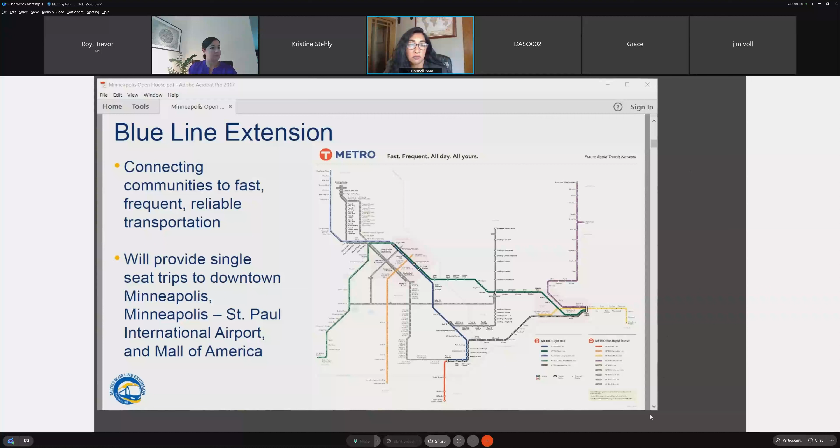fast, frequent, reliable way. The exciting piece about the Blue Line Extension is when you hop on one of those trains, you'll be able to connect not only to downtown, but to the airport and ultimately the Mall of America without transferring to another train. It's a single ride. If you do want to transfer to get to St. Paul, then you just hop onto the Green Line and make your way to either downtown St. Paul or the University of Minnesota or points in between. So it's part of a larger system that we see of connecting the region. And this is a very critical part for us, for some of the communities that are looking for a transit

investment. To talk a little bit about where we are in the project process, folks might be like, is this the same project that has been in discussions or thought about or designed for many years? Yes, it is the same project. So last year we had to take a little bit of a pause and just identify another way for us to move forward with the project. As folks may remember, part of our original alignment had 8 miles that was co-located with a freight railroad. That co-location of the light rail was on freight railroad right-of-way, so we needed their permission to be on the right-of-way. That was not an agreement that we were able to reach with the freight railroads.

So last August, the Met Council and Hennepin County decided to make a little bit of a shift and begin to think about how we can ultimately get this line into operations, but having a little bit more control of it. So last August, we began to talk to community members, basically reach out and say, how can we identify a community-supported route that can move forward and really serve our region and be part of that connected map as we just shared with you. So that's where we are right now. And our hope is that by the end of this year, we will have a community-supported route.

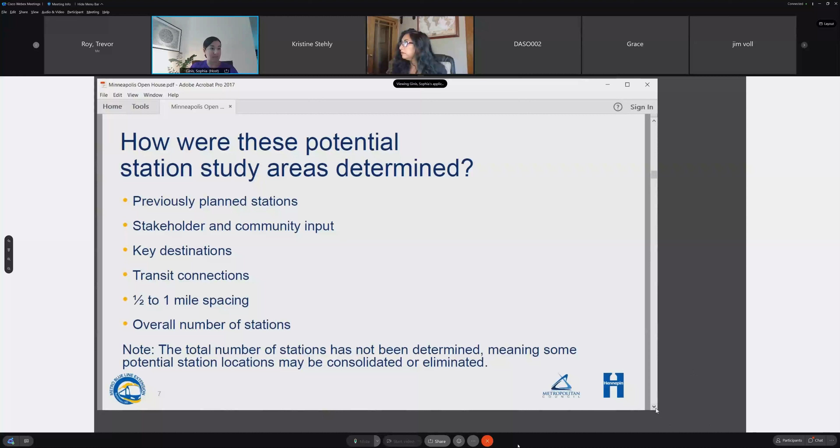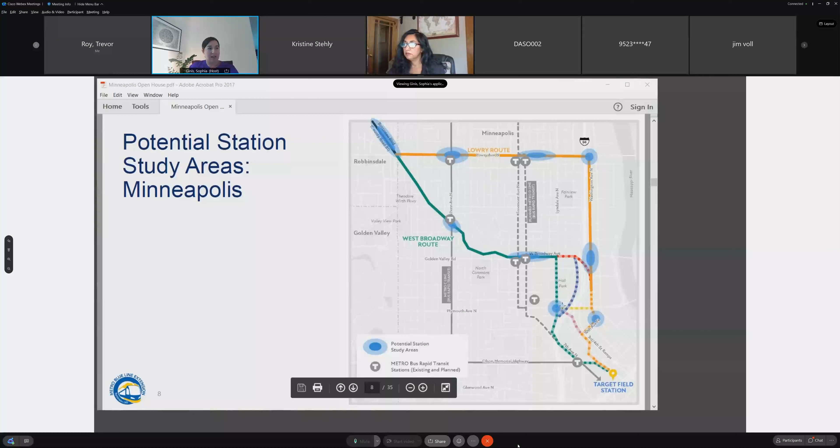And then something as we go through the links, potentially in that Plymouth area. And if you're traveling to West Broadway, there's multiple configurations that you could get there. So whether you're going the orange to the red, or some version of the orange to the pink, or the blue, or the green to the blue, having a couple stations placed along that way.

So how will we evaluate these going forward? We have a set of project principles on our website that speak to a whole bunch of different things, like serving people, improving transit, but also avoiding property acquisition, continued public engagement, and engineering requirements. What works the best purely physically, and what is best serving our destinations, major destinations, employment centers and things like that. The available right-of-way is related to the engineering requirements and how that all fits in. And of course, our existing land uses: what best supports a station the most in an area.

So things that we would like to hear from you. Are we missing locations, major locations that people want to go? Do these feel right for today and tomorrow? Any specific considerations we should be taking as we specifically place the stations, and honoring community assets along the way.

That's just kind of a little bit of an overview of our stations in Minneapolis. If you're looking for the overall project route, we do have more information on our website and can answer more questions on that.

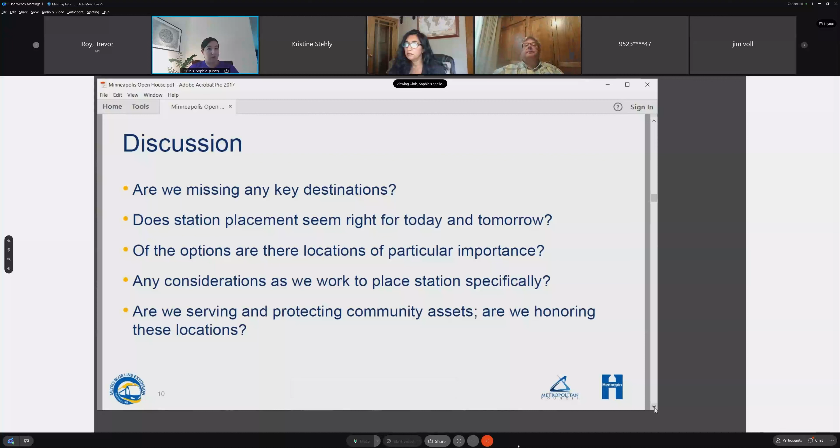So with that, I'm going to turn the presentation over to my colleague, Dan Soler, who is going to walk through some of how LRT could fit on these various corridors and some of the options that we've looked at: center, elevated, side running, all that kind of stuff. So with that, Dan, take it away. Thanks, Sophia, and welcome anyone here tonight to hear our presentation.

One of the things that we undertook as we started to look at these route options on Lowry or West Broadway was how would LRT fit? We know how wide the rail guideway is, and so knowing the right-of-way widths and the existing roadway widths and the uses of Lowry and West Broadway today, we wanted to do some visualizations that would be the first cut understanding of just how LRT would fit on those roadways.

So those are the two general characteristics, Lowry and West Broadway. We've got these links that Sophia showed on her map, and we've got some analysis to do on those as well. We know that we simply don't have room to just widen out Lowry or West Broadway, plop LRT down in the middle, and keep all of the existing uses that are there today. Both of those roadways provide space for travel, north and south, east and west along the roadways.

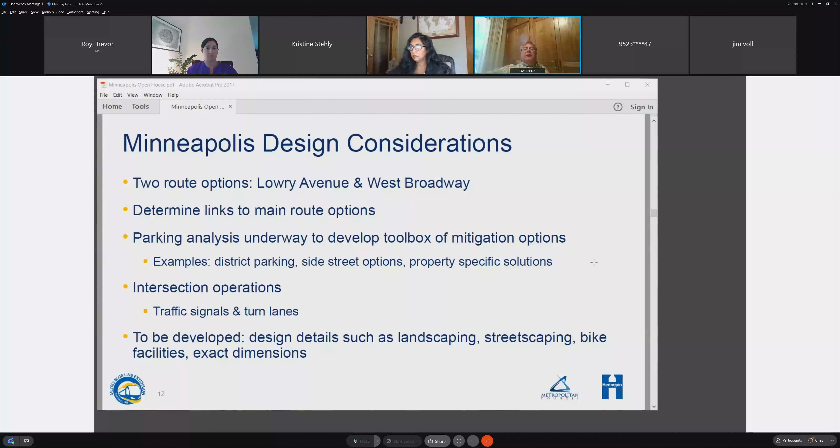And as I said, based on the actual width of the right-of-way and the current state of buildings adjacent to the roadway, we can't just widen and drop LRT in here. So we've come up with a first look at how it might fit, what could stay, and what might have to leave along these designs. Go ahead and go forward, Sophia.

So we're going to start up on Lowry. This is Lowry over on the western end, closer to Highway 81. This is a cut section where we took an aerial photo of the existing Lowry configuration and turned it into a rendering that visualizes what happens today. You can see along this segment of Lowry there's 2 lanes of traffic, 1 lane in each direction. There's a bike lane on either side of the travel lanes, and then there's some boulevards and sidewalks.

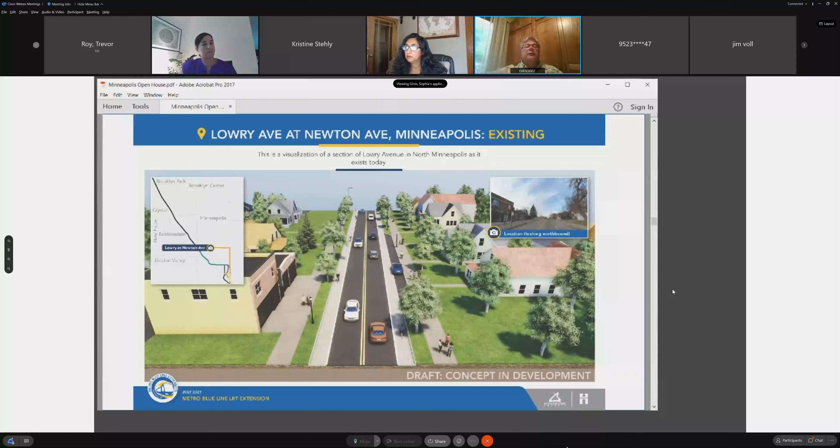Buildings along this section of Lowry are a little more scattered. They're not absolutely right next to each other. It's a lot of residential properties up in this area, homes with side yards or front yards set back. So this is the general concept of what it looks like.

The next drawing shows a concept of what it would take to put LRT in the middle. You can see we've put LRT down the center. That width is approximately 28 to 30 feet in the middle. We keep Lowry open as a 1-lane roadway in each direction as it is today. But of course, the bike lanes are gone in all cases. We put some sharrows on here, which could be an option to share the through lane with bikes. Other options will be analyzed, like moving bike traffic to adjacent streets.

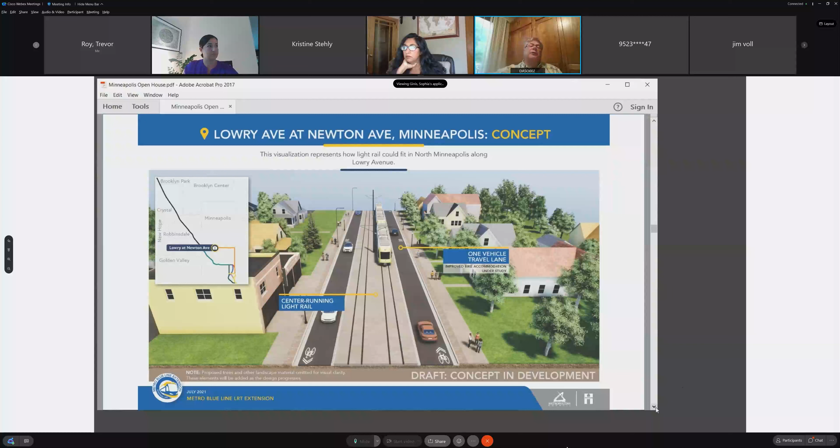And then the sidewalk areas become more integral to the curb than they were previously. There isn't really space for green boulevards. So while the properties are maintained, everything moves a little bit closer to the properties. We push the lanes to the outside, the sidewalks and boulevards become integrated together, and we've got one lane in each direction. So this is a sample of what it would look like on Lowry.

Moving a little further to the east on Lowry, as we get closer to Lyndale, Lowry widens out. It becomes a 4-lane road, 2 lanes in each direction, through a good portion of that part of Lowry closer to I-94 and Washington. There are bike lanes on the outside of the travel lanes, some parking, and sidewalks with boulevards on the outside. This is a much wider right-of-way than what is available to the west on Lowry, and it has to be because there's a 4-lane road in here.

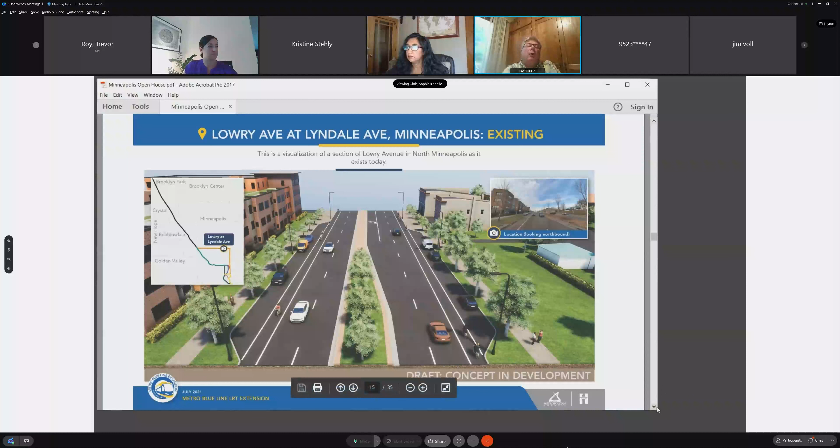There's parking in here. There's the bike lanes along here as well. And there's also a median, and a good size median, through a lot of that. So what we propose in the after in this segment would be that we would put LRT in the middle. We would kind of push it out. The parking that would be along there would go away. We would attempt to keep some bike lanes on the outside through at least a portion of this.

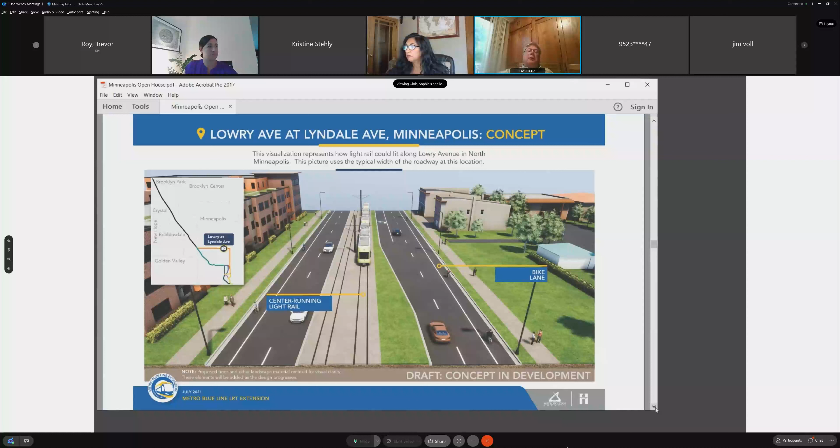And that'll be something we really have to work with the community on, because if the bike lane isn't continuous, where would it turn? Where would it go? How would it follow through the city? You can see we've got some medians out there still because we have to have left turn lanes, in this case at Lyndale up in front of us here, or at Emerson Fremont, further to the west along there. We're able to keep 2 lanes, and then 4 lanes, and we're able to keep LRT in the center. So this is a little bit about how Lowry would look on the far east side.

So the Lowry Route, as it was identified before, would come east and west from the Robbinsdale, Minneapolis border up by Highway 81, and LRT, in that route option, would run east-west along Lowry. And then we would make a turn somewhere around the I-94 bridge in that area, and we would turn to Washington Avenue, and LRT would then run north and south along Washington Avenue.

So for the great majority of Washington Avenue in this area, the west side of the right-of-way is I-94. So you've got the I-94 freeway, and then you've got either walls or slopes or some kind of a grade separation up to Washington Avenue. So that's generally the condition along the west side. Along the east side, it's generally industrial and retail commercial businesses. There is a sidewalk that runs along both sides of Washington Avenue, north and south. It's generally a 4-lane road with parking on the east side in some spots, on the west side in some spots, and left turns where necessary.

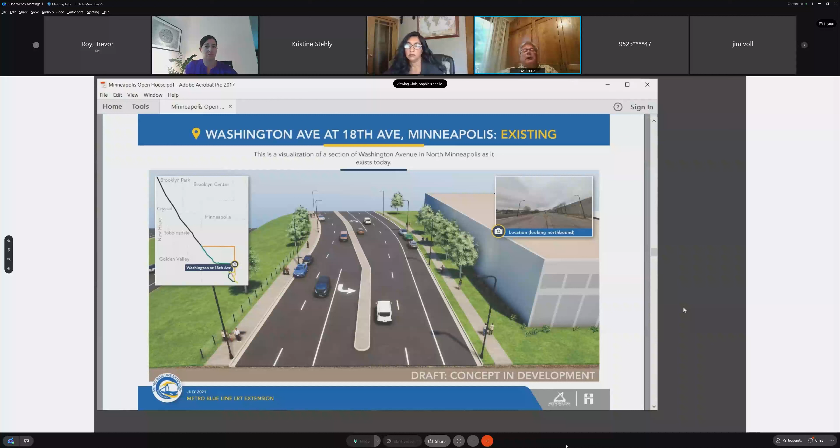This rendering, you can go back, Sophia, this spot right here where we were before, happens to be right about at 18th. And so you can see we've got a left turn lane, we've got 4 lanes of traffic, we've got some parking. So in here, if we were to put LRT in place, as you can see on the next drawing, we would put LRT in the center of Washington Avenue. It will continue to be open as a 2-way roadway on Washington. We would have 2 lanes northbound on the east side of the road. The sidewalk would essentially be in about the same spot. LRT would be out there.

We have center running rail, and we'd have a single through lane southbound and maybe parking on the far west side of the right-of-way there as well. Whether or not we need parking in here, whether or not that should stay, that would be something we would work with the community on to decide in each particular situation like this along Washington Avenue. A little easier, though, to place LRT simply because of the extra space.

So on this area of Washington Avenue, now we're south of West Broadway, and so I-94 is a little further away. We've got development on both sides. It's essentially a 4-lane undivided roadway with parking on each side. And again, the uses along here are, you can see a parking lot on the east side of this, the right side of this drawing. You can see more industrial buildings. We're looking a little bit at how much parking is utilized here. Would parking need to stay in the end?

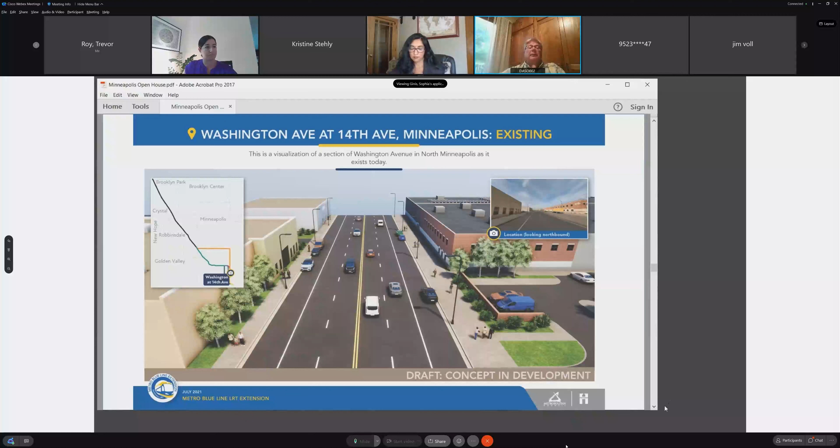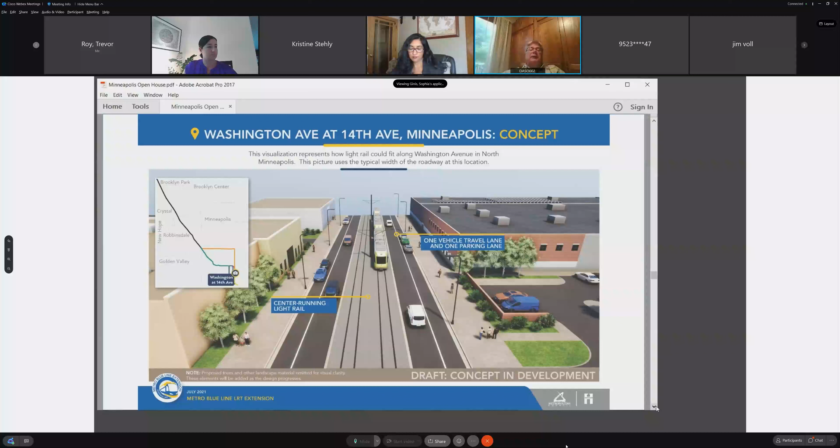So in this particular piece, we would put LRT again in the center. We'd put one lane in each direction and possibly keep parking on that side. If there was a feeling that it would be better to have a boulevard area or to have a through lane there instead of parking, we could analyze that as well. From a traffic standpoint, a single lane in each direction is generally adequate for this segment of Washington Avenue through this area. So that's a little bit about how it would look along Washington.

So mostly a 4-lane road. Some of it would be converted. Some of the lanes might be reduced through there in order to fit LRT. So that kind of follows the Lowry Route, which is Lowry and Washington Avenue. This next group of visualizations is going to be along West Broadway. And so our first one is up right near Queen, which is a little closer to the Robbinsdale border, a little bit further up north.

This is a segment. There's a good chunk of West Broadway that has this cross section today, where a center turn lane is in place for left turn lanes in each direction, with 2 lanes in each direction for through traffic. Parking is allowed in here when parking is allowed, since it's a through lane as well. A lot of the parking here is time restricted parking. So no parking for southbound in the AM and no parking for northbound in the PM in the outside lanes. Otherwise, during the day, parking is sometimes allowed.

Other than that, throughout times of the day, there's a left turn lane or 2 through lanes in each direction, and there's a left turn lane. Not really many boulevard areas in here. You can see the sidewalk is fairly small. The light poles and other signs and such are in the sidewalk along here in the current condition.

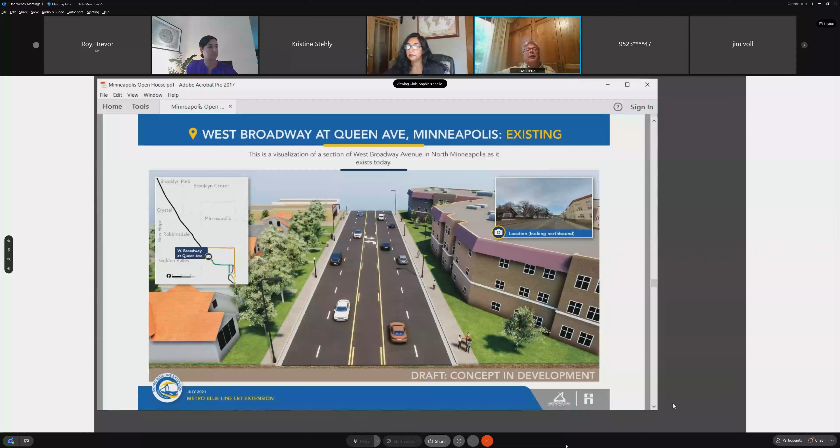So with this section, if we were to put LRT in the center, we would propose to put 2 directional LRT in the center of that roadway. We would convert 2 lanes in each direction to 1 lane in each direction. Parking would not be allowed at any time, and while we don't have exactly the dimensions worked out, we would try to make the sidewalk and boulevard areas a little wider than they are today in here.

So what is gained or what remains? Traffic is still open 2 directionally along here. The parking would be restricted, and we would work on other ways to provide parking, maybe some district parking, maybe cross street parking, maybe some parking lots for businesses along the route would be converted here. And the other part that, of course, goes away is the center left turn lane through here. A lot of that area of the center left turn lane is not used today.

There are a fair number of driveways. But as you look at this section, wherever we would have to place a left turn lane in, that would also require widening that is not there today. So while this reflects a typical section of West Broadway, it doesn't reflect an intersection area where we would have to put in a left turn lane. There would need to be widening.

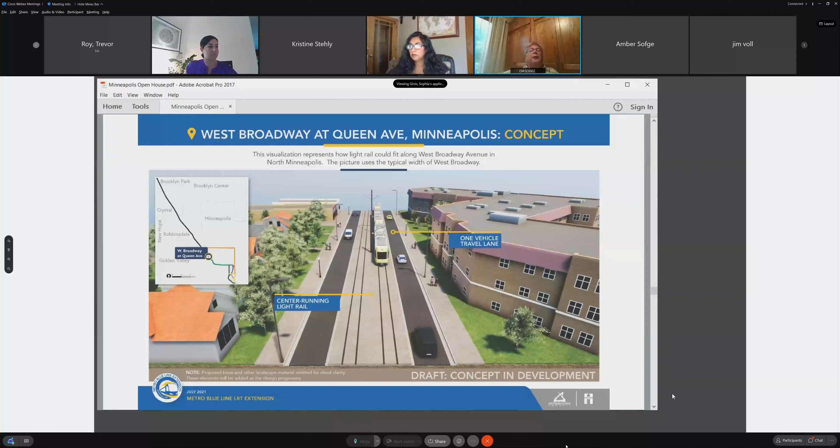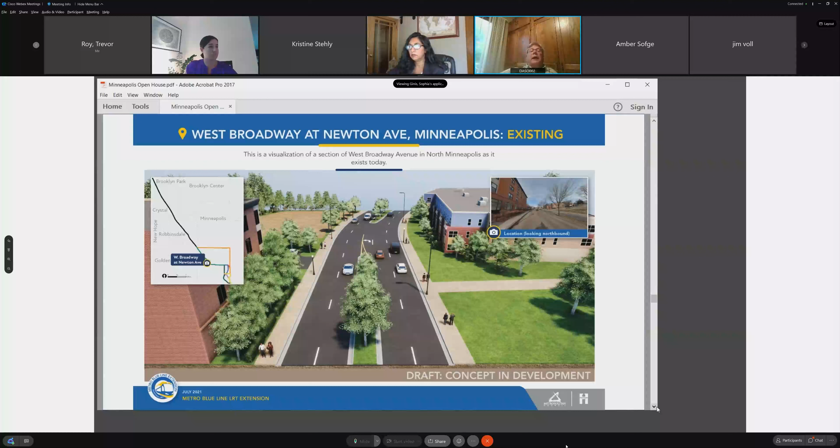So as we go a little further south along here, this is at Newton. In the Newton area, the center turn lane converts to a landscaped island. This condition isn't too long along West Broadway, but it's in a number of spots where left turn lanes are available for cross streets, but then the middle has a center landscaped island. Again, 2 lanes in each direction, parking on the outside lanes allowed at specific times of the day, fairly narrow sidewalks right adjacent to the curb in today's condition.

In the after, very similar to what we showed before. 2 lanes in each direction would become 1. Parking would be restricted at all times of the day along here and need to be provided in other ways. LRT would take up the center, and the sidewalks would get a little bit wider with a little bit more boulevard and sidewalk on either side. Though I don't want to pretend that they're getting tremendously wider, we would try to add a little bit of space on the outside.

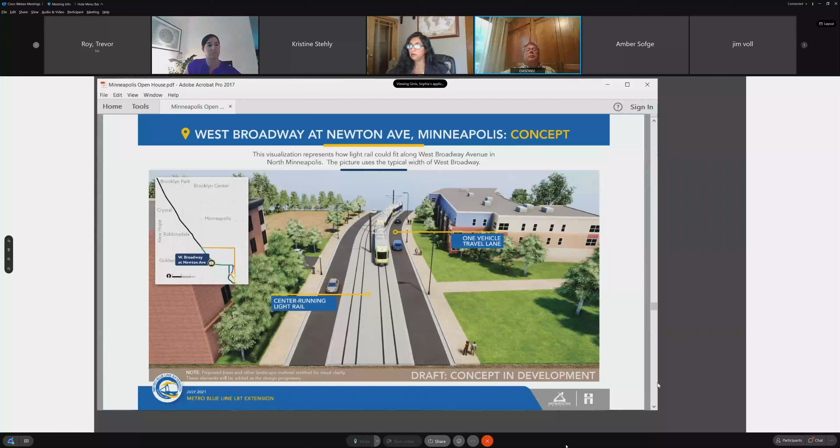Again, what this doesn't show is how we would deal with a left turn lane at a specific intersection. We will not allow left turns from the through lane. That would mean vehicles would be stopped, potentially backing up cars. It also would not allow for a left turn phase with a left turn arrow at any signalized intersections where left turns were made. And that's very important as we talk about crossing the tracks with trains going in both directions.

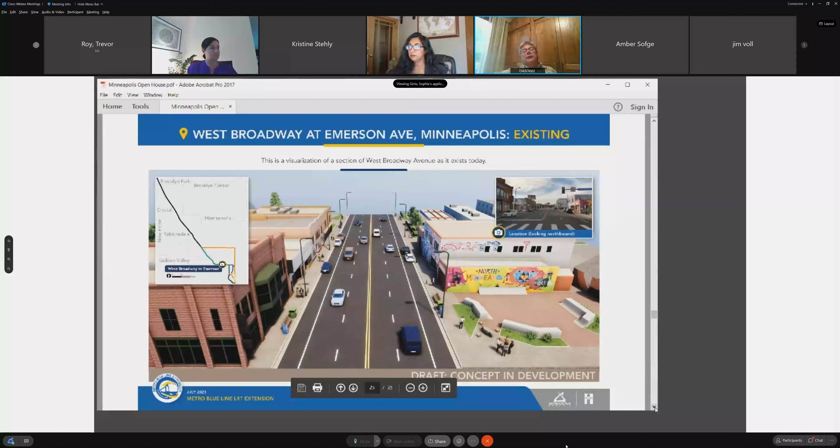So when we get a little bit further southeast along West Broadway, we lose that center turn lane or center median section, and we get more of a 4-lane roadway with 2 lanes in each direction, with just a double yellow line down the center without a median or center turn lane. But in this case, the outside lanes have been converted to parking lanes. And so parking is allowed for most hours of the day, if not all day, on those outside lanes through this area. This is right by Emerson. And so here, 2 lanes each way with that.

What we've done here is, again, converted the center into 2-directional LRT, taken the 2 lanes in each direction, made it 1 lane in each direction, eliminated on-street parking from these areas, provided the sidewalks on the outside with a little bit of additional width, but again, not allowing parking and not allowing here on these drawings for left turn lanes. Specific locations for those intersections would have to be provided for left turn lanes.

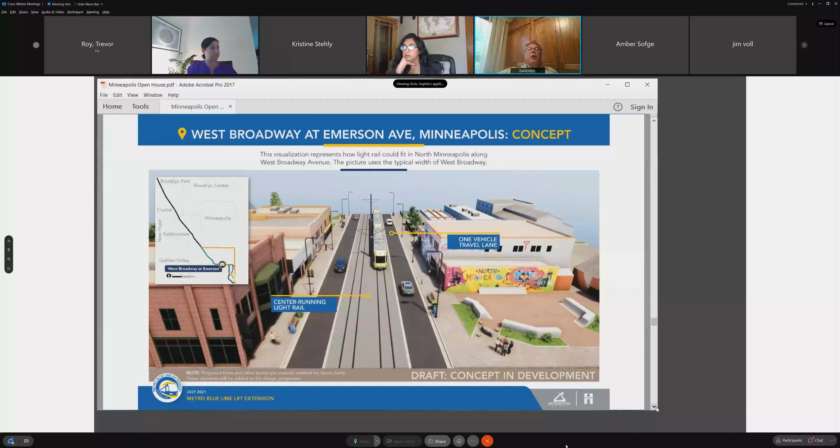So in summary of the West Broadway piece, in general, West Broadway is for the most part a 4-lane road today with 2 lanes north and 2 lanes south, though the outside lanes do allow parking in them for some hours of the day, making it more like a 2-lane road than a 4-lane road. In all cases, West Broadway would be 2 lanes, no more than 1 lane in each direction with LRT from Lyndale or 94 all the way up to the Robbinsdale border.

There's parking allowed in most areas on West Broadway today, some of it all-day parking, some of it restricted time parking. In all cases, on-street parking on West Broadway would go away in the after condition. Those are the 2 primary driving things that happen with no LRT on West Broadway versus LRT on West Broadway.

The pieces then that we're really needing to test out are, where do we have left turn lanes? Where do we need to do some widening in order to accommodate left turns? Which intersections are those at? And how do we accommodate those spaces? So that was kind of the general look.

In all of the drawings I showed you, the designs were center running LRT with traffic on both sides of the guideway. We looked at a couple other options. One was to put the guideway up in the air above the roadway. And so we drew some elevated sections on what elevated LRT would look like. This happens to be on West Broadway.

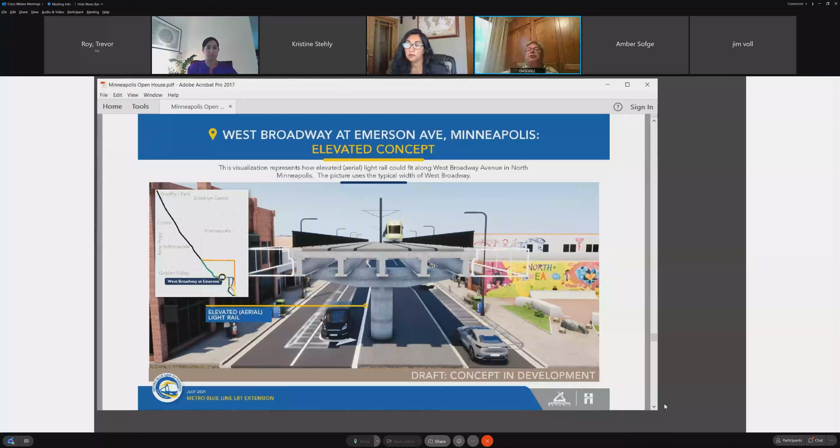And then we'd have the challenges not only of having that station up in the air, but how would we get people to it? So it is an idea. It's not totally discontinued. We're not getting a lot of energy out of, ooh, this should be elevated, as we're presenting this to the public, but it's one of the things we need to keep in our toolbox as an option, if not for all of the corridor, maybe for some spots of West Broadway moving forward.

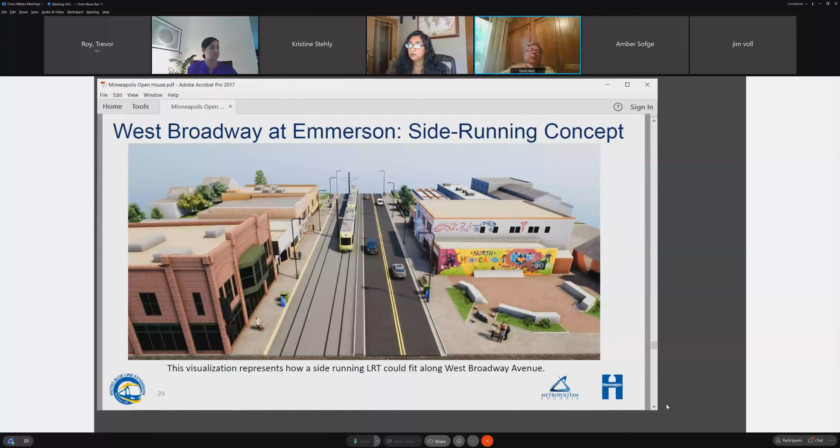The next slide shows a little bit about what side running might be like. There are some advantages to side running in that it allows for both directions of travel to be on one side of the road. So if somebody was stalled, for example, eastbound, they could use the westbound lane to go around them, or vice versa. But one of the big problems with side running LRT on an urban arterial is whatever side it's on, all of the driveways that come out onto the roadway would really have to be closed on the side of the road that has the LRT.

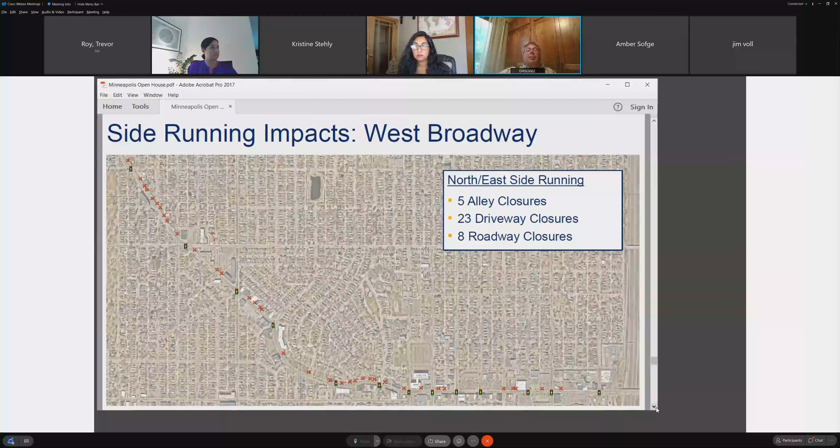Now, where there's a traffic signal, like you see on this drawing, we could keep those intersections open with signalized control, but we'd be closing like 30 some access points between alleys and driveways and roadways on West Broadway. And if we were on the other side, we would be closing again 30 plus access points along, in this case, the north side of the roadway. And same with Lowry. Any side running on Lowry, we close many access points along there as well. So we've really kind of taken side running off the table.

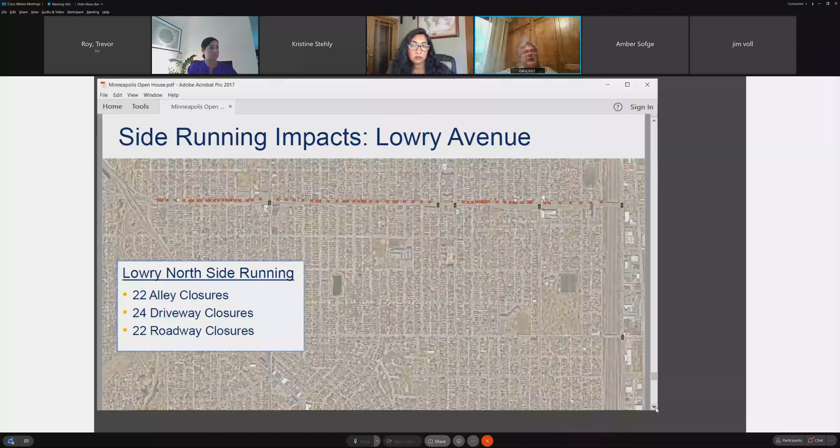It really isn't a good option for an urban arterial street running LRT. The ability to control signals and to keep the driveways and at least right in, right out access coming on and off of either Lowry or West Broadway looks to a center running LRT.

So we've brought these out and we've started to have discussions about these. We're getting a lot of feedback about the pros, the cons, things people like, things they don't like. And of course, as we gather up that information, we'll continue to refine and address topics like parking and topics like traffic signal control and turning movements and driveway access along these routes to help guide us to what makes sense for the best locally preferred and community supported alternative and option out here. So that's the visualization piece.

Sam, are you going to take this piece on community wealth building and anti-displacement? Yeah, Dan, absolutely. Thanks for that. And I know folks probably have a lot of questions on what Sophia shared and what Dan shared. We just have a couple more slides we just wanted to bring you up to date on and some of our other activities in addition to the technical work that Sophia and Dan shared. Obviously, if you have any questions, feel free to put them in the chat or we'll just sort of take your questions. Sophia can facilitate that here at the end.

But as we talk about these projects, we know they're extremely transformative, especially if you look at the existing blue line, the existing green line, or even the green line extension from Eden Prairie to downtown Minneapolis that extends the green line from St. Paul to Minneapolis and continues going out west to Eden Prairie. They are transformative. What we want to ensure and what community members and businesses have told us is that, yes, we understand that they transform, but let's make sure that we're also building community wealth.